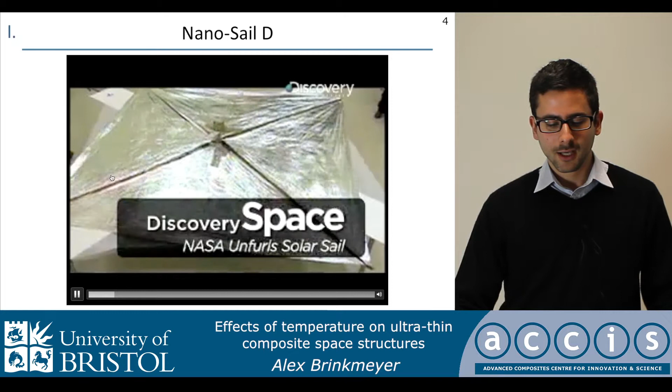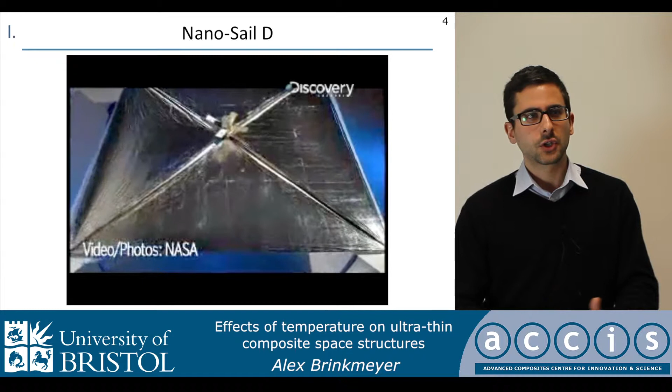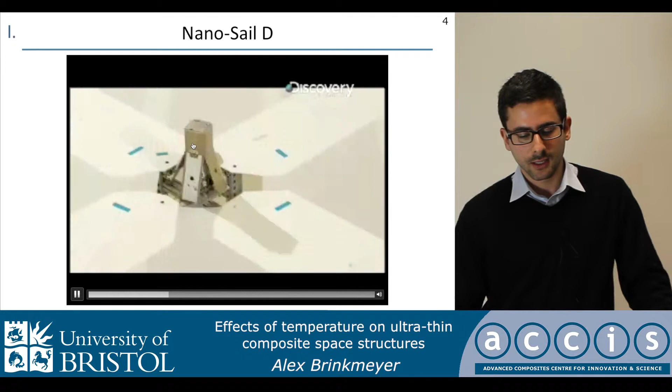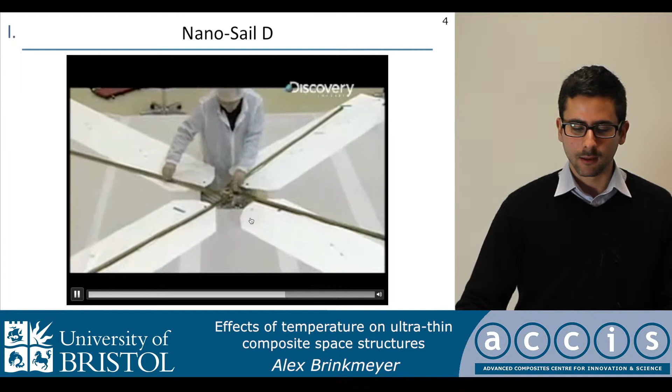It deploys using this system. The whole sail is enclosed into this small structure, and at some point during the mission, the flaps are opened, and four central tape spring structures unfold from the structure. You'll see this in a second. So here you go. Basically, these four structures entrain the sail as they open from the flap. They release the sail from a central spindle as it unfolds. You can see the deployment in motion.

Recently another mission, called the MARSIS mission, was designed to investigate the atmosphere of Mars using radar. The deployment of this radar was subjected to some stowage conditions on ground. During the release of the structure, some delay in the deployment was experienced, and the latching of the structure was not complete. So it's really important to understand how these structures behave on ground prior to release in space.

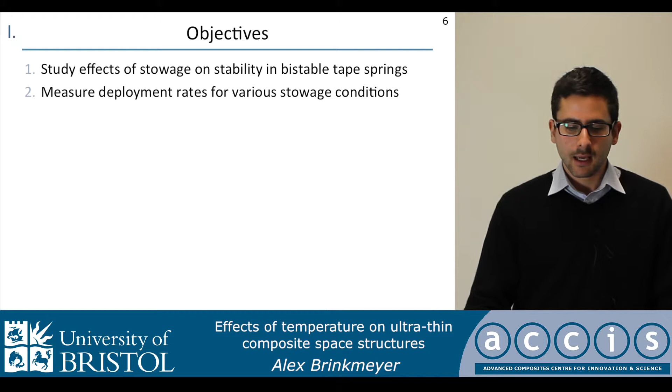The objectives of this presentation are to study the effects of this stowage on the stability of these structures called tape springs, to measure the deployment rates for various stowage conditions and see the effect of temperature on that deployment, and to model the effects of stowage on the deployment using an analytical model.

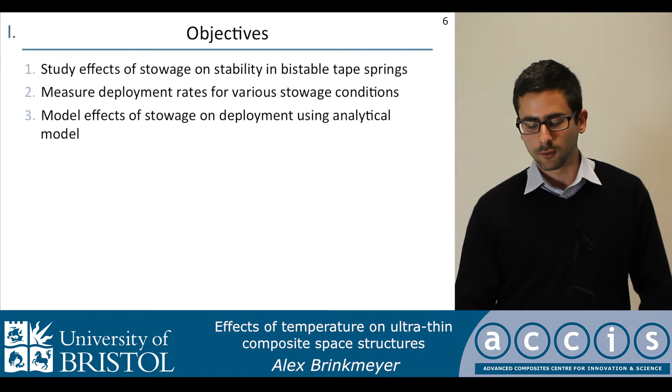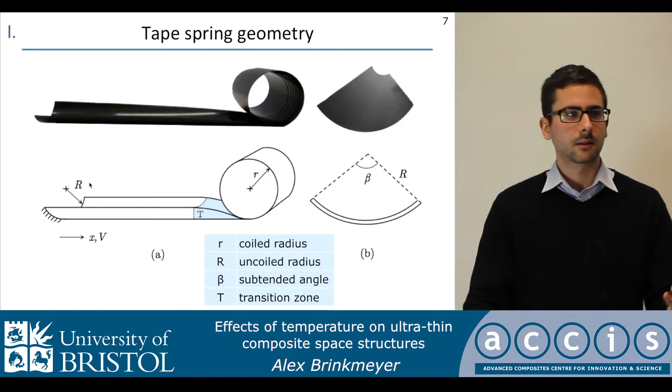What we use for this structure is a thin ply carbon fiber prepreg. This carbon fiber has extremely small thickness, 30 microns. These are the properties that have been determined using Instron tests at room temperature. For this structure, we use this antisymmetric layup, shown as follows.

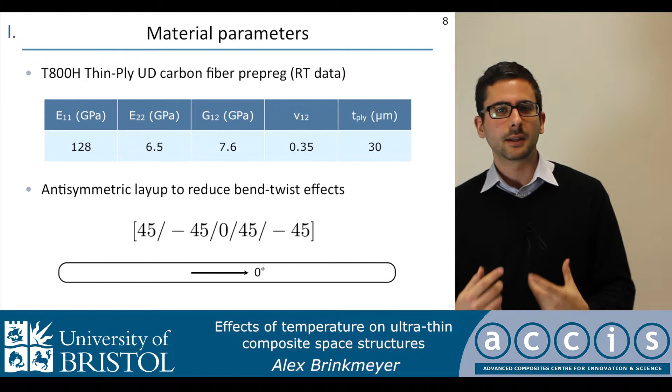The use of an antisymmetric layup is needed to reduce some bend-twist effects during the deployment of the structure.

So how we model the structure is detailed as follows. We first start with a relaxation model, designed to model the viscoelastic effect, specifically the relaxation effects of the structure when it is stowed on ground prior to deployment. The output of this model is the ejection force of the structure, which will determine how the structure unfolds. Then we have a second model which models the deployment of the actual structure.

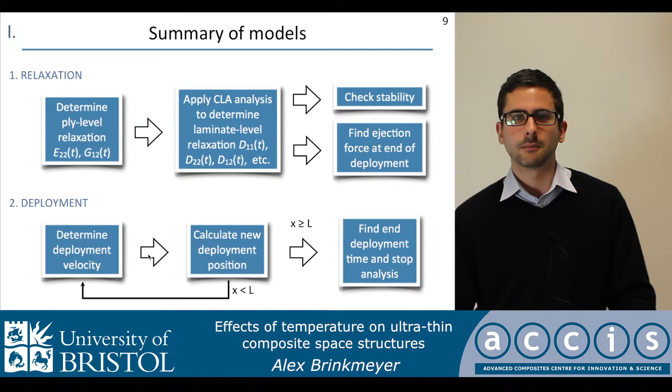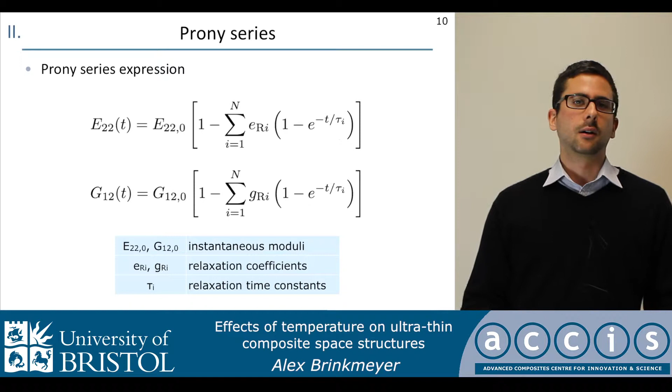The material model we use is called a Prony series, basically a sum of decreasing exponentials. In order to characterize these coefficients, we need to undertake experimental tests. These experimental tests use DIC cameras, and this experimental test was conducted at Caltech, using DIC cameras plus a thermal chamber which controls the temperature of the specimen.

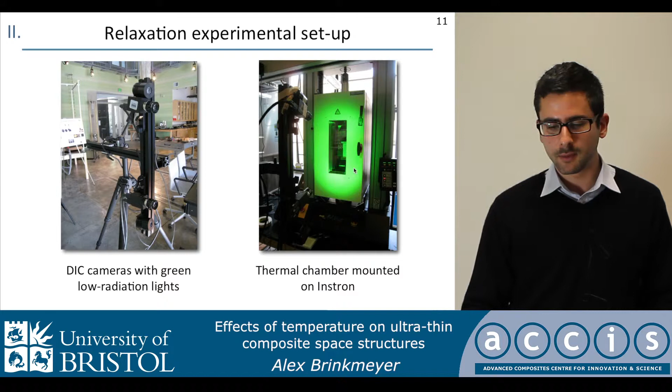These are the results of the test at 60 degrees. We have a relaxation of the modulus, specifically the transverse modulus of a laminate, a 6-ply 0-degree laminate. This is to understand how the transverse modulus relaxes with time. We assume the longitudinal modulus is constant as it acts in the fiber direction, and we fit the Prony series I showed previously to this experimental data.

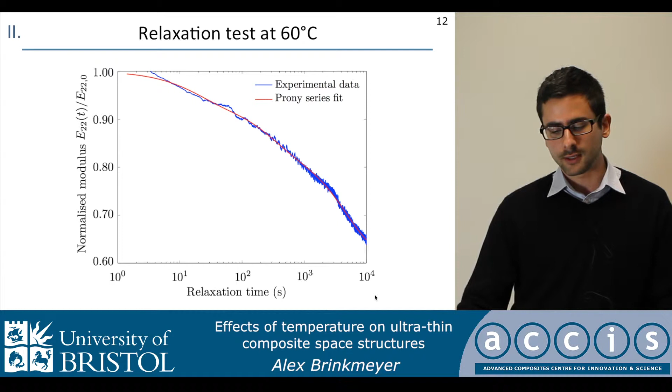So you basically get about a 35% decrease in modulus after 3 hours of relaxation. This is 3 hours, or 10 to the 4 seconds.

Now the ejection force is modeled using the following model. I'm not going to go into too much detail. The ejection velocity is simply determined using a kinetic energy balance, and is shown as follows.

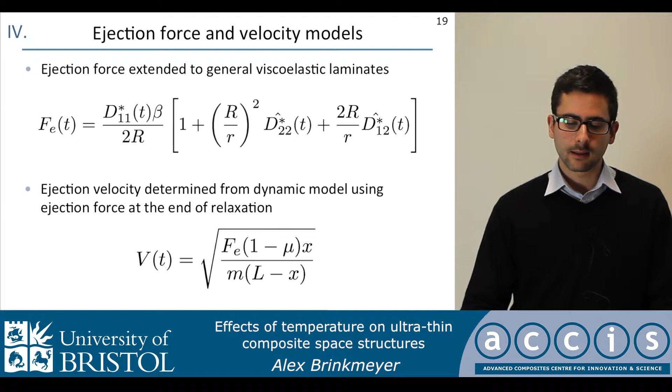If we go into the results, the ejection force decreases similar to the transverse modulus, so you get a strong decrease with time. This is shown for 60 degrees at 3 hours.

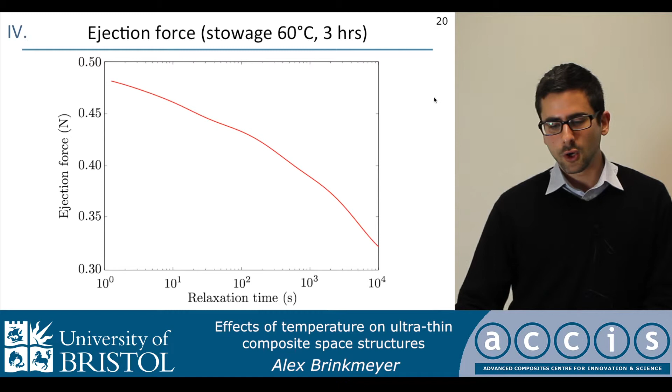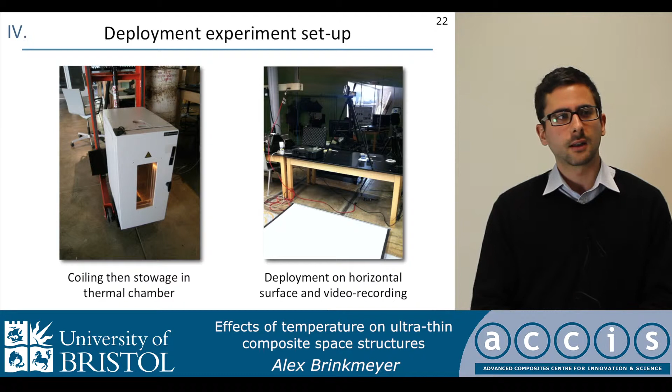Now this was the relaxation part of the model. Now we're looking at the deployment. In order to test the deployment, we first coil the structure into its coiled state, then we stow it in a thermal chamber, and then we finally deploy it on a flat surface.

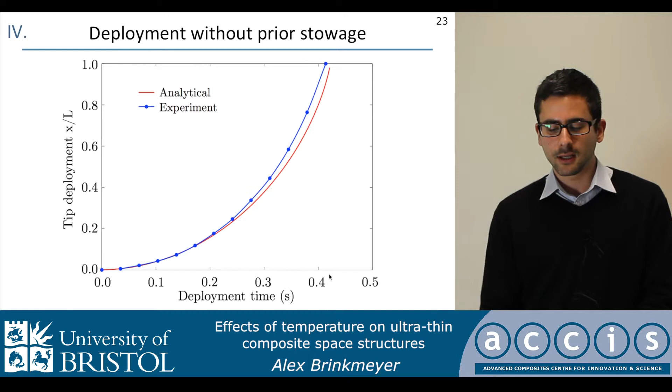So when we do not have any stowage, when we deploy it immediately after it's coiled, this is what we get, and the analytical model follows relatively well the experiment. We get a smooth unrolling of the structure with time, and deployment is achieved after about 0.4 seconds for a 1 meter structure.

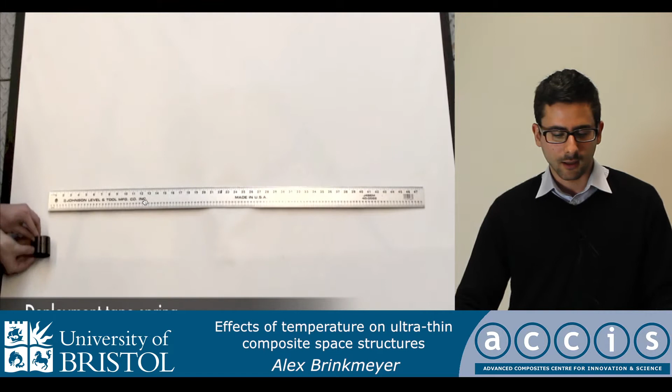So this is how it looks like in reality. The deployment in this case is manual because of the short time constraints we had, but you can see that deployment is relatively smooth and fast.

Now if you look at a case where you apply stowage, what you see is an increase in the deployment time, as you would expect, because the ejection force has decreased. You can also see that the analytical model does not match as well the experiment, but this can be refined later to incorporate other models.

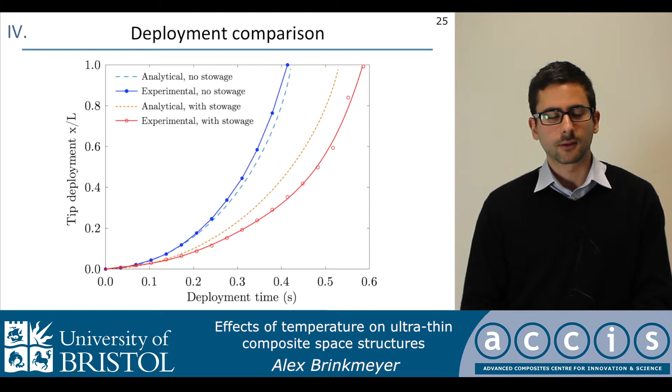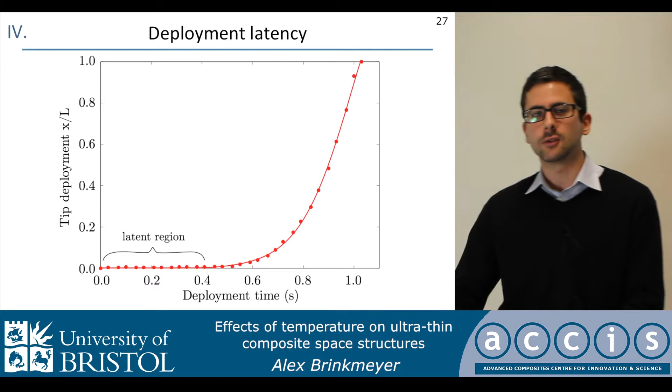What we also get, which is an interesting case, is when you deploy the structure, you initially get a period of static, latent behavior. So you first get no deployment, and then you get the fast deployment as predicted, and this is not currently predicted by our model.

So I'll show you both cases. This is the normal case, but as you can see, in the main window here, you have the case with relaxation, and in the inset window, you have the no relaxation. You can see the delay in deployment, and that this arrives much later than the case where no relaxation is applied.

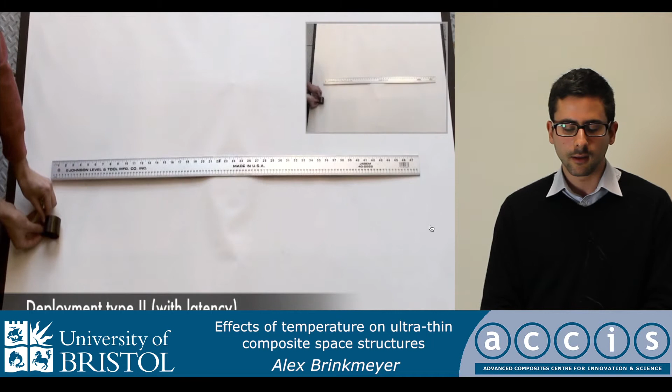Now in this case, what happens is you have a latent behavior, a delayed deployment, and this might be important when you consider a space deployment where you need an immediate deployment. This might be interesting to take into account.

Now what happens if you stow it for very high temperatures? In this case, we stow at 100 degrees for 3 hours, and you get a very particular case, which is not predicted by theory in this case: there is no deployment at all.

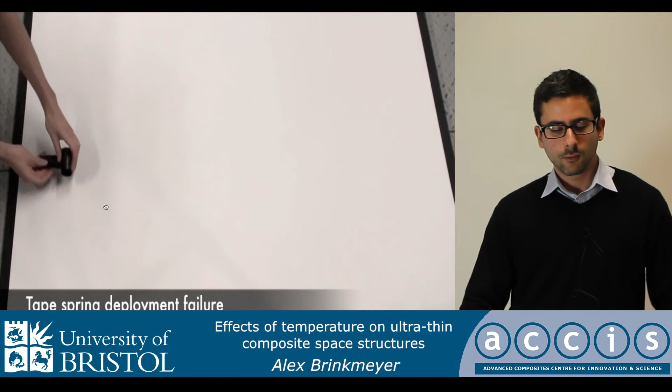So the structure fails to deploy, and this might mean that you lose your mission in this case, because you have a behavior which is completely unexpected, and you're relying on autonomous deployment, whereas in this case, you get none.

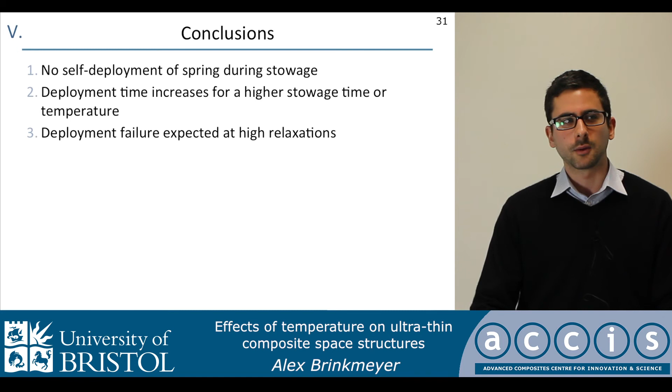So the conclusions of this study are that you do not have any self-deployment of the spring during the stowage period, that the deployment time increases for a higher stowage time and temperature, but also more crucially that you have what you might call deployment failure at high relaxation times, and this needs to be taken into account in the design of future space structures.

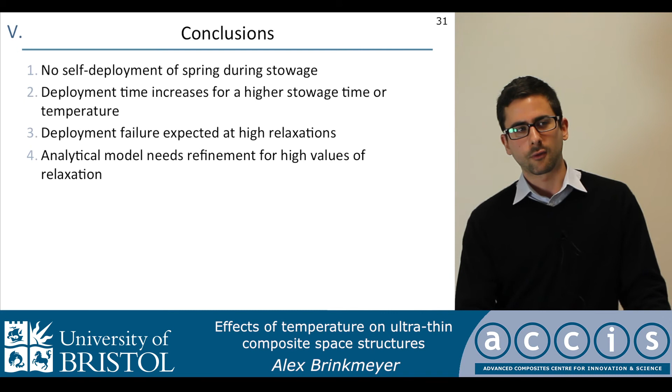Finally, the analytical model needs to be refined for higher values of relaxation, as you could see that discrepancy increasing for those high values.

So in future work, we could implement maybe a numerical model to include 3D effects, improve maybe the material models, and possibly also consider other layups.